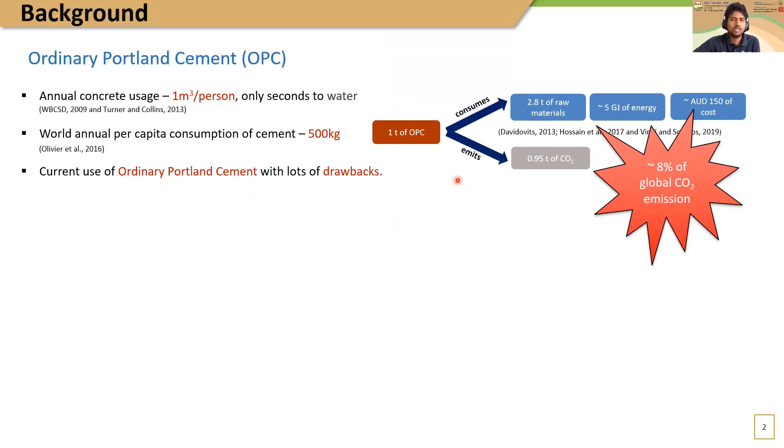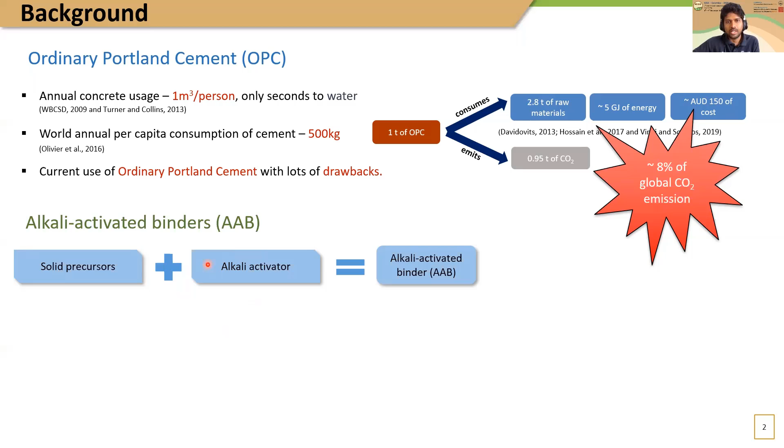Therefore, alternative cements, such as alkali-activated binders, had great attention over the past decade from the cement and concrete community. Alkali-activated binders, or AABs, are basically composed of two parts: solid precursors and alkali activators. Industrial waste, such as coal ashes and metal slags, generally serves as the solid precursors, and commercial alkali hydroxides and silicates serve as the alkali activators, as shown here.

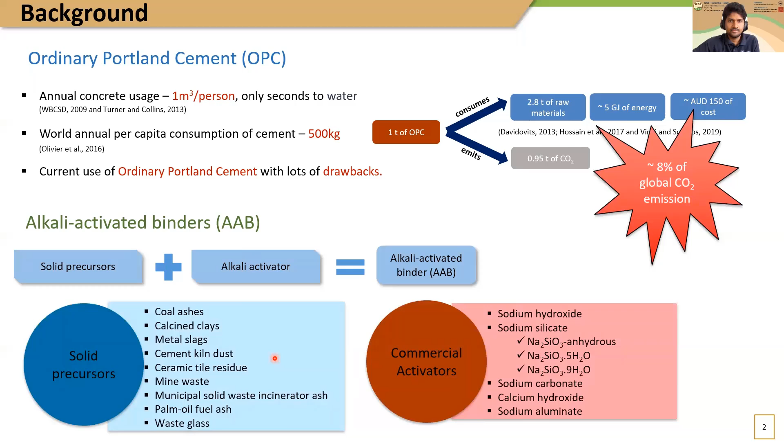Let's check the applicability of waste glass in alkali-activated binders. You know, glass is manufactured by melting a mixture of silicon dioxide, sodium carbonate, dolomite, and limestone at a high temperature up to 1600 Celsius. Every year, millions of tons of glass are generated in the municipal waste glass stream, and less than 10% is recycled due to high contamination of impurities.

Some of the different types of glass include soda lime glasses, which come from bottles and containers. Borosilicate glasses come from chemical apparatus and pharmaceutical wares. Fluorescent lamp glasses come from light bulbs. Lead glasses come from televisions and electronic parts. Flat glasses are generated from motor vehicles and the building construction industry.

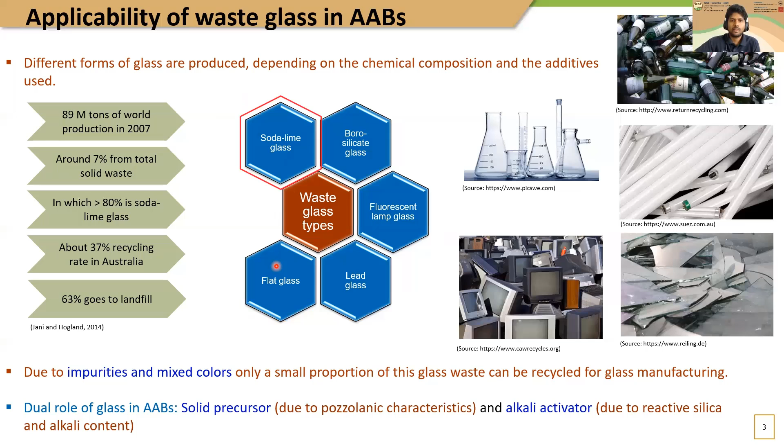Of these several types of waste glasses, the soda lime type is responsible for the highest waste generation, about 80%. Also, soda lime glass generally has higher silica and calcium contents than other types of glasses. Therefore, it has the most potential to use as a solid precursor and alkali activator in alkali-activated binders.

This slide shows the chemical composition and particle size distribution of raw materials which I used in my research: fly ash, blast furnace slag, and waste glass. In my research, I used waste glass in both ways: as a precursor replacing fly ash and as an activator replacing commercial sodium silicate. I have used fly ash and slag as solid precursors and powdered waste glass mixed with sodium hydroxide as solid alkali activator to cast one-part alkali-activated binder.

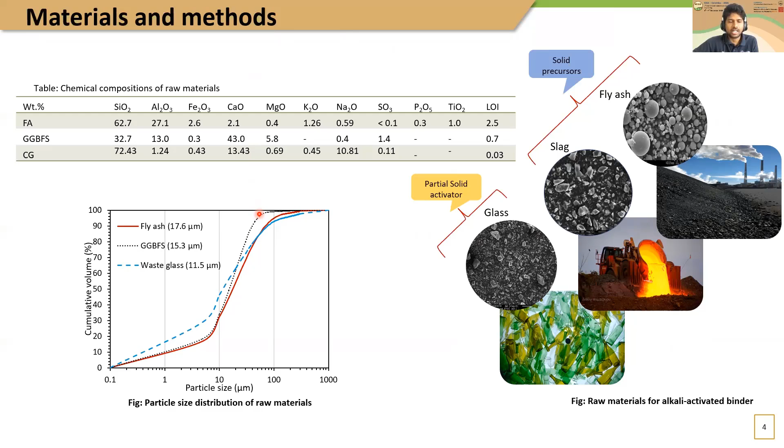If you consider waste glass based solid activator powder, our final objective is to prepare sodium silicate, which is a better alkali activator in fly ash slag cement binders. Here, waste glass acts as a silica supplier, and sodium hydroxide acts as the main alkali source to form sodium silicate.

In the case of using waste glass as an alkali activator, it was prepared in solid form rather than using liquid and corrosive alkali solutions such as sodium hydroxide or sodium silicates. Therefore, it is called one-part alkali-activated binders, and they have several advantages in handling and mixing at in-situ conditions compared to two-part alkali-activated binders, which use liquid alkali activators.

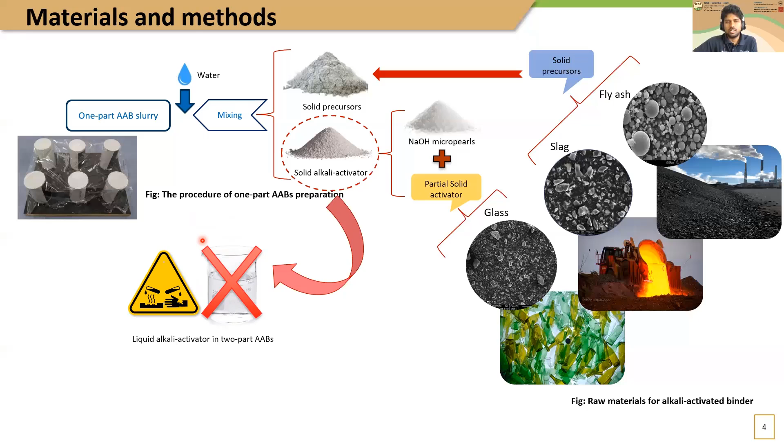However, the soda lime type bottle glass used in this study contains impurities other than silica. Therefore, the solid or dry activator produces other silicate and carbonate products with the heat treatment. So the efficiency of producing crystalline sodium silicate in the solid activator needs to be assessed. Using X-ray diffraction, or XRD, we could identify the mineralogy and then quantify the efficiency of producing crystalline sodium silicate. XRD results show that it produces more than 70% of sodium silicate.

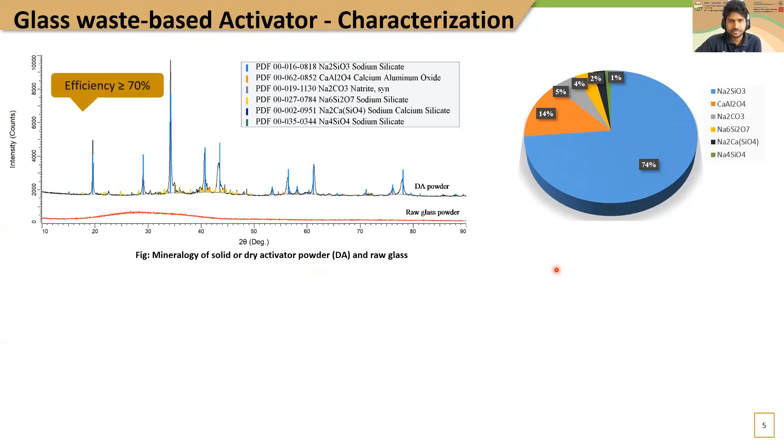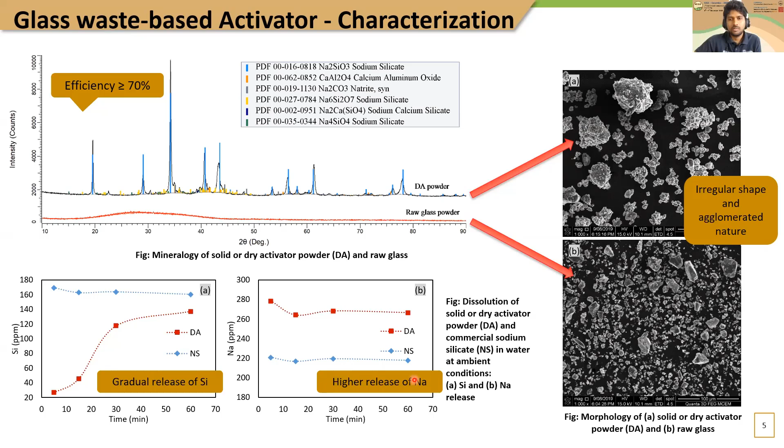Dissolution of dry activator was also assessed using ICP-OES tests. These graphs show the dissolution of dry activator in water compared to commercial sodium silicate, abbreviated as NS here, considering a 1 hour time period under ambient temperature and pressure conditions. Graph A shows silicon ion release, while graph B shows sodium ion release for both dry activator and sodium silicate powders. Results show a gradual release of silica in dry activator powder compared to commercial sodium silicate. However, sodium ion release is much higher in dry activator than commercial sodium silicate, confirming better dissolution of dry activator in water.

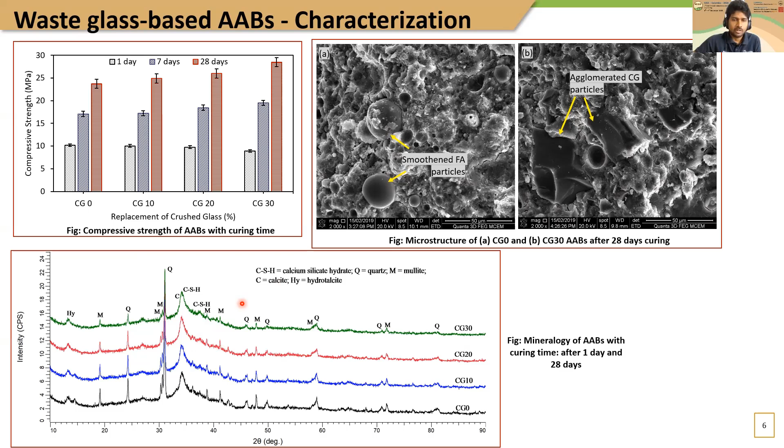It also showed fewer unreacted minerals of fly ash and slag, which we used as raw materials, in the hardened phase with the curing time. Therefore, these results confirm that waste glass would be a better alternative as a mineral precursor for one-part alkali-activated binders.

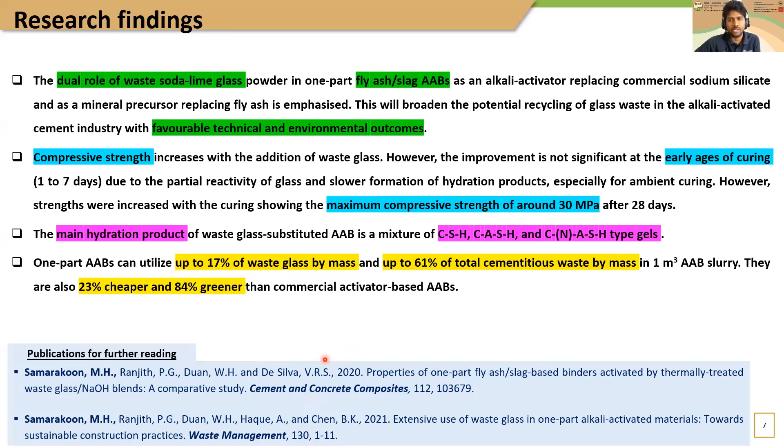Finally, one-part alkali-activated binders can utilize up to 17% of waste glass by mass and up to 61% of total cementitious waste by mass in 1 cubic meter of alkali-activated binder slurry. They are also 23% cheaper and 84% greener, that is emission effective, than commercial activator-based alkali-activated binders. If you are interested, you may refer to this publication for detailed results and discussions.